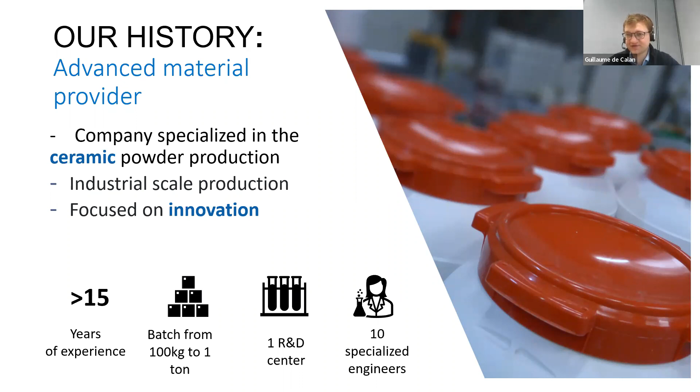It was 2018 when we started developing materials for 3D printing, and what we offer to the market is a line of ceramic and metal filaments. Ceramic being mainly alumina, zirconia, and silicon carbide ceramics, and the metal filaments being stainless and tool steel.

We also offer a whole range of equipment to use these filaments. We're not equipment manufacturers, but we quickly found out that most of our customers required us to offer a full package so that they could really start printing, debinding and sintering our material as quickly and as smoothly as possible. So we do offer equipment that is not manufactured at Nanoe, but we work with partners for such equipment.

Just a very quick word about the technology, and we'll dive more into details afterwards. We talk about ceramic and metal filament, but we actually manufacture composites. That means a filament that is usually a mixture of a ceramic or a metal powder and some binders that will help to shape the part.

This obviously means that to get to a final ceramic or metal part, you need to have a post-process to remove those binders. And that's, let's say, the magic trick that allows us to make a ceramic filament. Of course, if it was pure ceramic, making a filament out of it would be difficult.

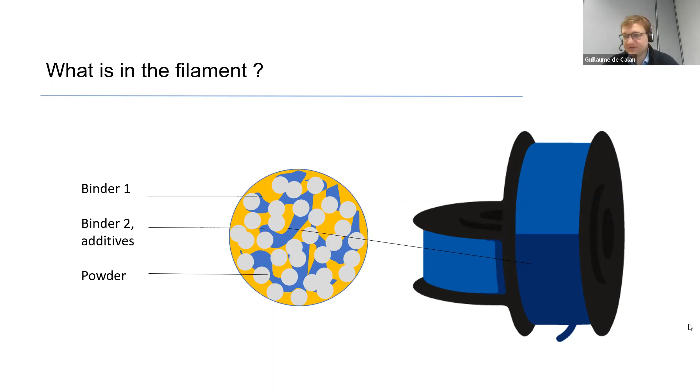So why did we choose that technology? Why did we choose to develop FDM instead of other technologies on the market? For us, it brings a few distinctive advantages for that market. The first one is that it's a really low-cost investment technology. It allows to break the price barrier, and it's also a very easy-to-use technology. And that really solved the main pain point we saw on the ceramic 3D printing market.

Metal is a bit different, but for ceramic, there is still a very low adoption of 3D printing for the moment. We feel that one of the reasons is that there are very few equipments available on the market, and these dedicated printers are usually extremely expensive and quite complex to use, mainly directed at very industrial applications where you can afford such printers and such complexity. We, on the other side, wanted to develop a technology that allows to democratize ceramic and metal 3D printing.

The way of doing that is, instead of having a dedicated printer for ceramic and metal, we use standard FDM, FFF printers from the market, and we just add our filament into it. That makes the technology low cost and quite easy to use, while still keeping the properties of the material. If you have a ceramic, you'll still have the hardness, the heat resistance, and so on. If you have a metal, you will still have the tenacity and the strength of the metal. And of course, the advantages of 3D printing in terms of complexity, small volume production, and all that.

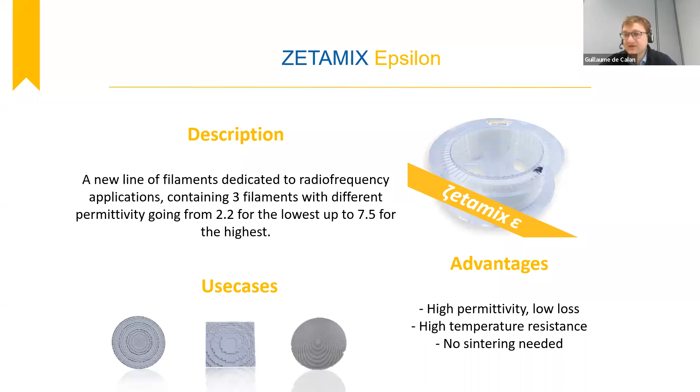So now let's dive a bit into the technology. How does it work and how does each of these steps work? The idea of this presentation is really to cut down the process step by step, so that you really see how that works, understand better, and maybe remove some reservation you may have about the technology. We're going to try to be transparent also about what can go wrong in the process, so that you understand what are the key points you should be looking at.

So the first thing is a global overview of what we're going to see today. When we do ceramic materials, we usually have four main steps: file preparation, which is also called slicing, printing, debinding, and sintering. Sintering is done under air for ceramics. If we switch to metal, then it is very similar, except that you don't necessarily have a debinding step, at least not a chemical debinding step. It does depend on products. And the main difference is that sintering is done under argon, which is really quite different. We'll show a bit of details about this in the process.

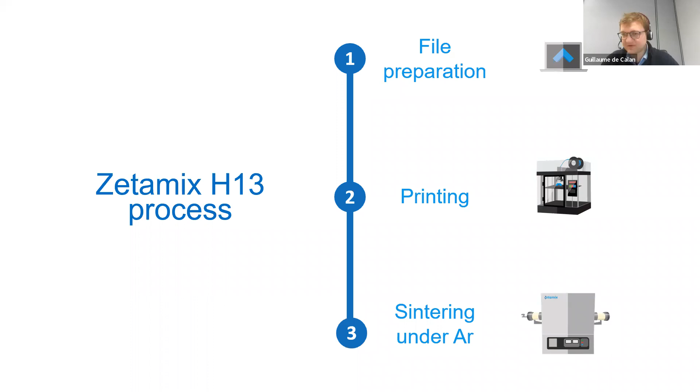So let's start with file preparation. To be honest, that's where we're going to spend the most time, because most of the success of the full process is linked to how you're going to prepare your files. If your file is well prepared, and if your design is adapted to ceramic and metal 3D printing by FFF, once you've printed the part, you shouldn't have any surprises. You shouldn't. But again, that requires understanding the key elements of file preparation, and it also requires respecting design rules.

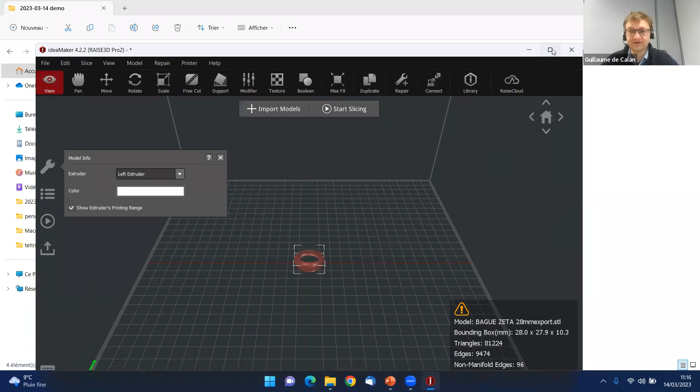So I'm going to go out of my presentation and open the software we're using for file preparation, the slicer, so that you can really see how that works. So here we go. We'll start with a very simple part so that you can see how that looks, and then we'll go into more details. Here you have an example of a part we print very often at Nanoe. It's one of our demo parts, a small ring with the Zeta for Zetamix, which is our brand for ceramic and metal filaments. It's an interesting demonstration for us.

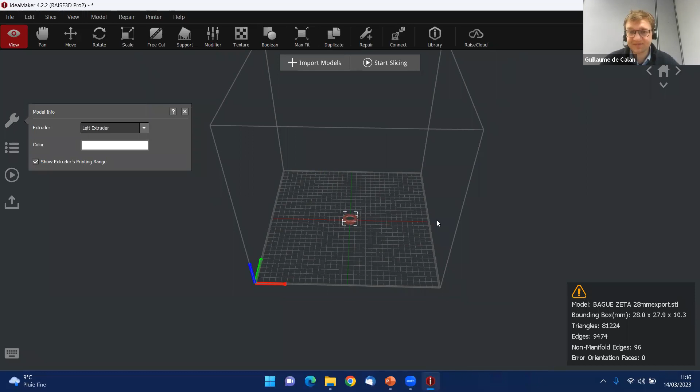We have opened it in a slicer called ideaMaker. It's the slicer of Raise3D, which is one of the brands we're working with. Of course, we could use different slicers such as Cura or others; this would be similar. You can visualize here the actual printing space, which is quite big on this printer: a 30 by 30 by 30 centimeter plate. So if we were printing rings, we could consider printing several. Just by copy paste, you can create the second one, the third one and so on. Here the interest is just to show you, so I'm going to suppress these, but if you have a big plate, you should probably use it.

So once we have the part in the slicer, the first thing we're going to do is scale it. That means we're going to print it bigger than the size we actually need, because we're going to have shrinkage during sintering and we need to compensate for it. The exact shrinkage rate you need to apply is indicated in the data sheets of our products. I might show you that in parallel with the presentation. You go on our website, zetamix.com or zetamix.fr.

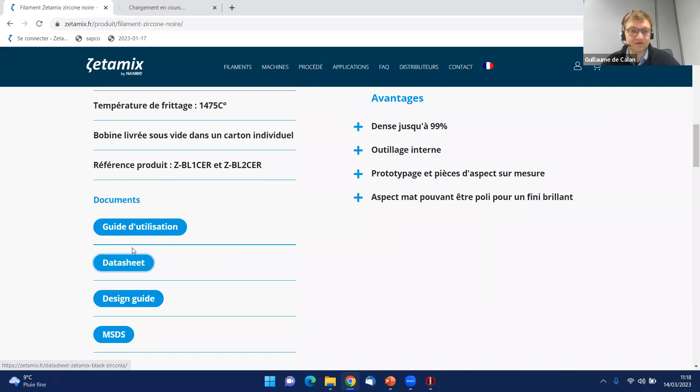You click on the filament you want to use. Today we're going to make the demonstration with black zirconia. So let's go for black zirconia, and here you will have lots of documentation: a user guide, a data sheet, a design guide, and a safety data sheet. So you could use either the data sheet or the user guide. We're going to just click on the data sheet. I think that should be enough.

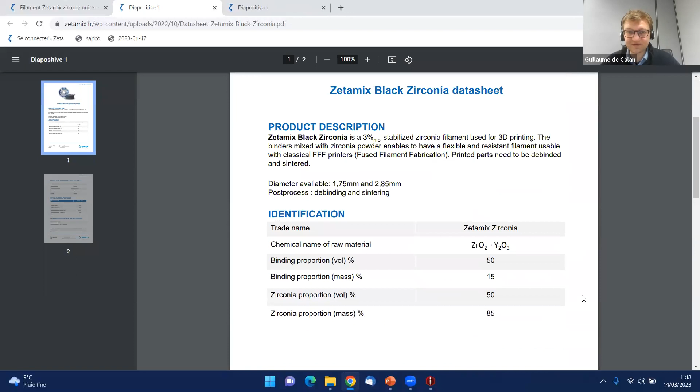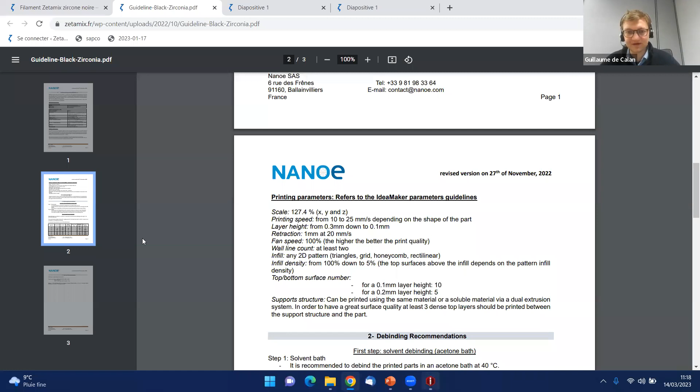And you'll have some information about the filament, and the data we're looking for is the shrinkage. And I was wrong, it's not indicated very clearly here. It is written here, but actually we'll go into the user guide where you'll have it written more clearly on the scale factor. The scale you need to apply to the part is 127.4 for black zirconia. So I go to my part and I say that I want to increase it by 127.4, and that's it. This is the size we need to print if we want to have the right dimension at the end.

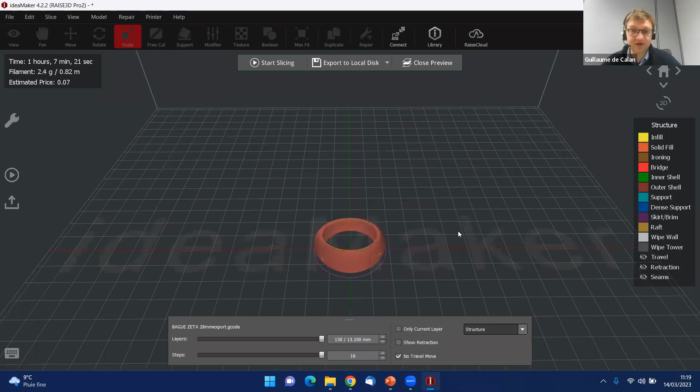So if I want to prepare the file, the first approach is quite simple. I could just go, sorry, I went a bit quickly, on start slicing, use a predefined set of parameters, click on slice, and that's it. The part is ready to be printed. So I can go and have a look at it, see how much time and material it requires. Here's 1 hour for that print. It's a bit long, but probably the printing setups are relatively slow. We could probably do a bit faster, but for a basic print, that's fine.

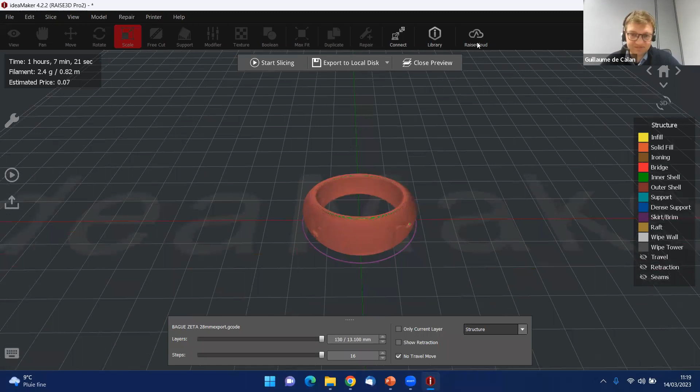I'll immediately draw your attention to one thing, and then we're going to go into the more detailed parameters of slicing. In that part, which is a preview of exactly how the part is going to be printed, you can already see layers if you zoom a bit. These layers here are the way 3D printing works. You're cutting the part in layers, typically 100 micron. If I dive into the print, I'll see several different colors. I see a red contour, a green one, some yellow infill, and also a bit of orange.

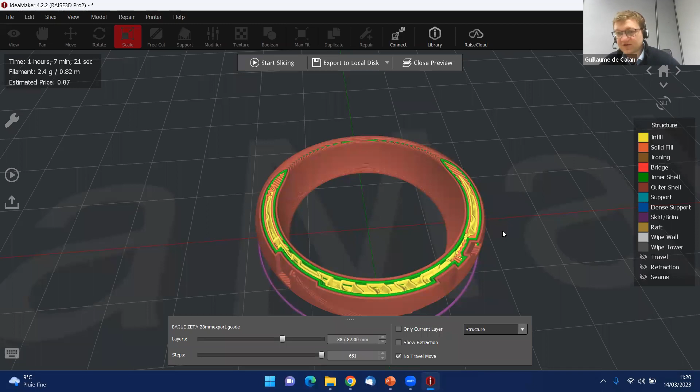All of these are different zones of the print. So usually when you print with FDM, you always start by printing the outside of the part, the contour, what we call the shell. And here we've decided to print two shells, the red and the green, on each side. We do that to have a more precise print and a better surface finish. And then we will fill the inside, and we can decide to fill it completely dense, or, like here, fill it with a porous structure.

That's really a choice. And on the top and the bottom of the part, to make sure that you have something completely closed, you will usually print what we call a solid fill, so the bottom and the top are completely closed. So that's the first thing. With the material, we also offer preset profiles. You can use them directly, no question to ask. It's pretty simple, and that's it.

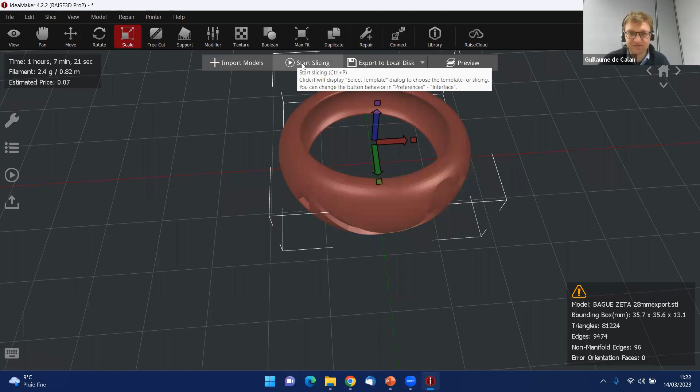So now if you want to dive into more details, you'll see that there are a few key parameters. It was written on the slide. The main parameters that are important and that you may play with, we usually say there's around 10. So if I go back into start slicing, instead of clicking directly to slice, I can either edit or just double click on it. I will have access to all the advanced settings. As you can see, there are literally hundreds of them, with a lot of different parameters and a lot of different tabs here.

So you can really play on hundreds of different parameters, all of them being really relevant. They all do have an advantage and an interest. But for the sake of simplifying and of not keeping you for 2 or 3 hours in a row, I'm not going to detail all of them, just the 10 main ones.

The first one is very obviously the layer height. So basically, I'm going to slice my part into layers. How big are those layers? We usually use 0.1 millimeter for ceramic and metal prints. We could do smaller, but we're a bit at the limit of FDM precision. We sometimes go bigger if we have very big prints, sometimes 0.2, but 0.1 is really a comfortable number for us, and we usually stick to that.

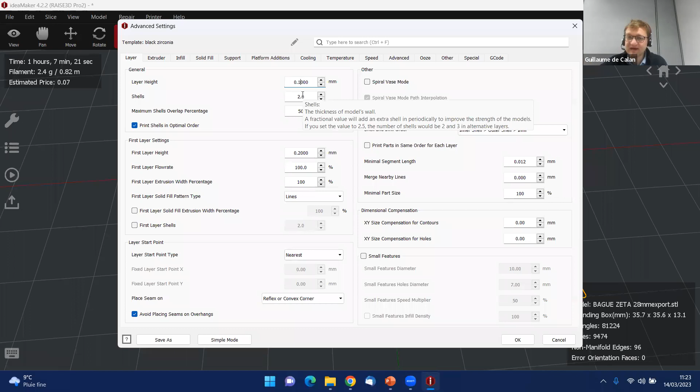It's usually a good compromise also between print quality and time. I did mention the shell, the fact that we're starting by printing the outside of the part so that we have a nice surface, and then we fill the inside. So the number of shells is also a critical parameter, of course, and here we have set it up to 2, which is probably a standard choice, even though it may depend if you need a thick shell or not, depending on: do you need a strong part, do you need it light, are there some specificities, do you need it to be watertight or not, and so on. But the normal setup would be probably 2 shells.

And we'll go to the extruder, where we also have 2 very important setups, the extrusion width and the retraction. The extrusion width is, of course, linked to the nozzle size you're going to use. Usually on our printers, we use 0.4 or 0.6 millimeter nozzles. We've printed with smaller, we've printed with bigger, but usually, again, 0.4 to 0.6 is the right compromise.

And one of the important things is that even if you have the 0.4 millimeter nozzle, you may choose to have an extrusion width which is slightly bigger than the nozzle. And we actually usually recommend it. We recommend to print with a slight over extrusion, which is better for the adhesion between layers. So typically, if you have a 0.4 nozzle, we would print with a width of 0.44.

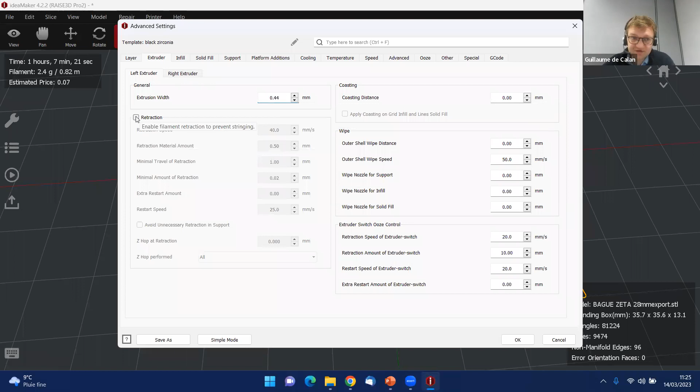Retraction is also very important. Retraction allows you to make travels between 2 zones of the print where you don't print, and to avoid having any leakage of material, what we also call oozing sometimes. So to avoid the material oozing from the nozzle because it's melted, you actually retract the filament a bit to make sure it doesn't come out where you don't need that. So it's important for some prints. For some prints, you may completely deactivate it, but for most prints, we would recommend using a retraction.

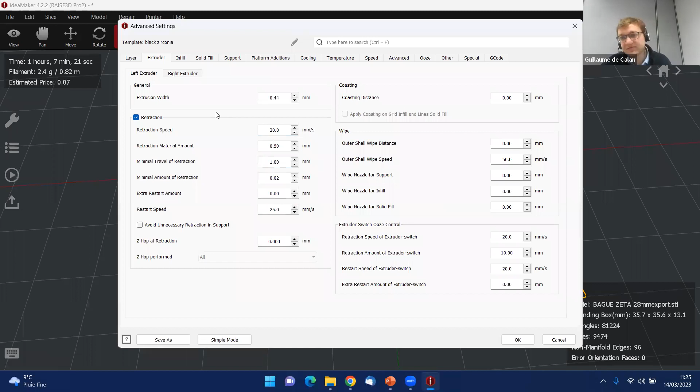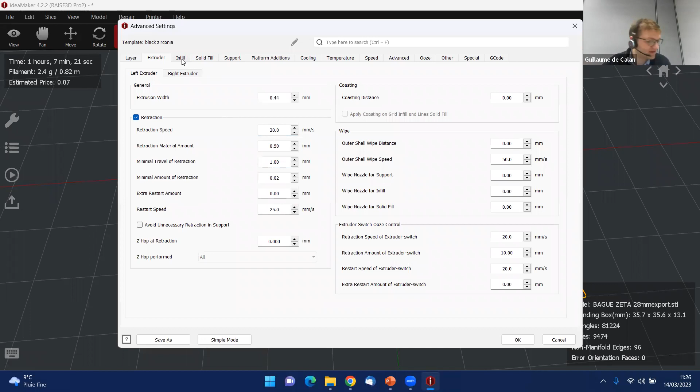The only thing is we're going to be quite careful about retraction speed, probably lower it a bit so that we really have a smooth retraction. The one thing you need to remember about these filaments is that they are relatively brittle, they are fragile, and so if you print very fast and then retract very fast and then reprint very fast, you may break the filament. So we always try to be quite gentle with the filament, and typically on retraction we would be relatively slow. So that's the two main ones on the extruder.

Then there is the infill, which is of course very important. We have a few things to choose here. The infill density, the extruder we're using, usually we use the same material, of course. The infill density, you may choose to put it between 30 and however high you like. Less than 30 is usually difficult afterwards to actually print the top of the part, so we don't recommend going below 30. And the shape of the infill is important also. So you can make grids, honeycombs, whatever. We usually like to use a gyroid infill because it is relatively isotropic, and for most prints it's preferable. But again, that's really a choice.

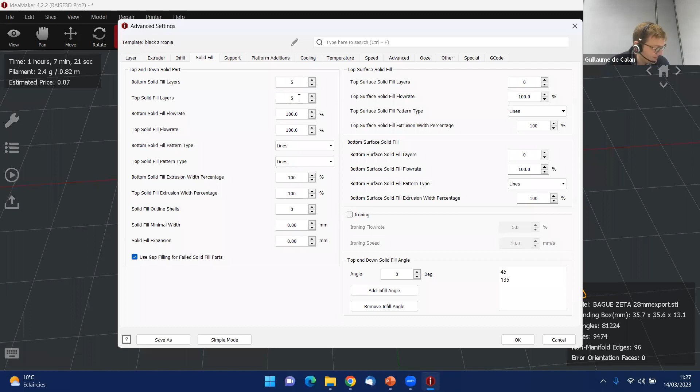Once we've seen that, you'll have the solid fill where you just define the number of layers you want to be fully dense on the top and the bottom so that your part is closed. Sometimes you may choose to have a part which is open on the top or on the bottom. It's actually very favorable for debinding, so sometimes we just choose to leave it open, in which case you just put 0. But that certainly does depend on the part you want to print. We'll talk about support later on, so I'm just skipping this one. The part we have for the moment doesn't need any supports.

Platform adhesion is also not necessarily the most important thing here. Cooling is quite important, but the settings are pretty simple. We usually, for ceramic and metal, try to cool quite effectively, starting at the second layer. So why do we need to cool the part? It's because, of course, you're melting the material to deposit it. If you want it to keep its shape afterwards, it needs to cool down as fast as possible.

And here we will have a difficulty, which you'll see just afterwards: we're printing at relatively low temperature because the material softens at very low temperatures. So if we want it to retain its shape afterwards, we really need to cool efficiently once it's outside of the nozzle. So we'll just put the fans to 100%.

So temperature depends on the filament. It's also in the data sheets that I just showed on our website, which is really where you should look for information, and that's where they are updated every time we have a new version. So the printing temperature for black zirconia is 180, and the plate temperature is 60 degrees Celsius. It's not absolutely compulsory to have a heated plate, but if you have that option, we usually heat it up a bit. It improves plate adhesion a bit.

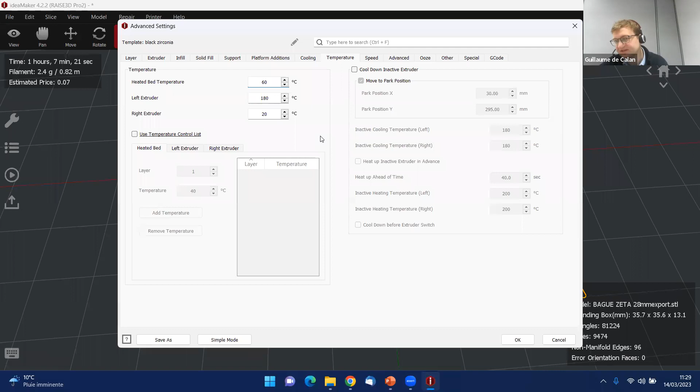Speed is important, of course. We usually print at relatively slow speeds, so that certainly depends on your part. If you have big parts, you may want to increase that. You could go to 40, maybe 50 millimeters per second. But as a first setup, 20 millimeters per second for everything is usually fine.

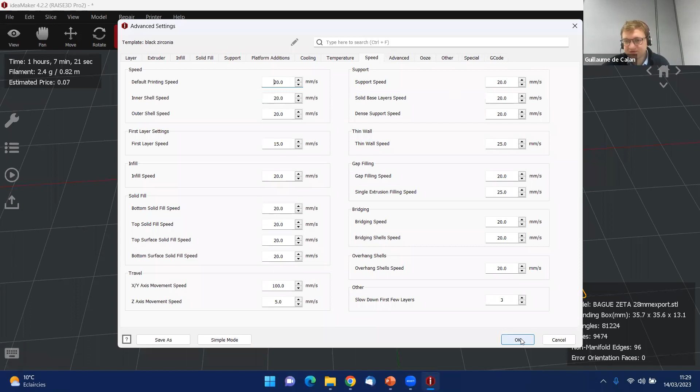And I would say that's it for the moment. The rest are really advanced setups, and I'm not sure you necessarily need to know about these. Once you have filled in all of your information, you click on OK, you click on Slice, and that's it. You have prepared your print. You can preview it just to check if everything is happening as you would expect. Here the print looks good, and then you can just export it either directly to your printer or to a USB stick, and you just launch the print.

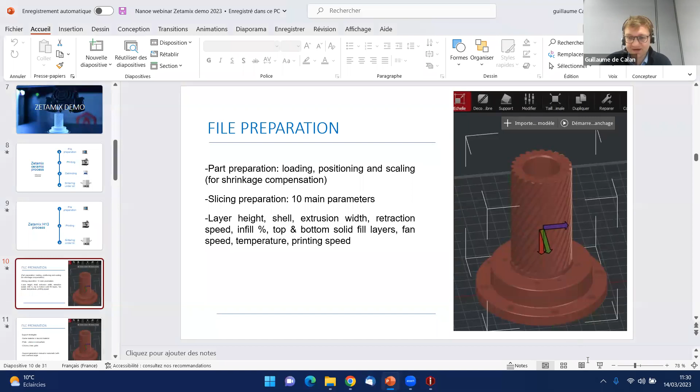So that's it for the basic parameters. Of course, this part was very simple. You're probably going to ask a lot of questions on supports and all that. I already see a few Q&A questions. I might actually have a look and see what the questions are. Some of them are probably answered later on, so I'll keep them for later. But you should really feel free to keep asking.

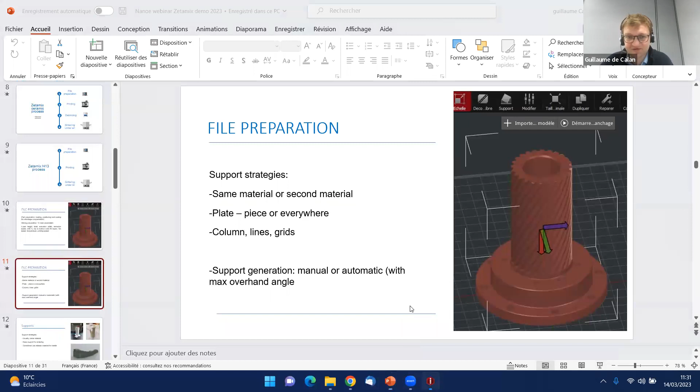So that's really the basic steps. Then you may have a few other considerations. The first one is probably supports. That's something that will happen quite often. You need supports for printing, and sometimes you also need them for sintering. So of course, if I want to do supports, I will need a more complex part, because my part is too simple. You don't need support here. I'm going to delete that one and open a new file. Import model. Wait a minute, I think it's going to be simpler to do it that way because I know where the part is. Here we go.

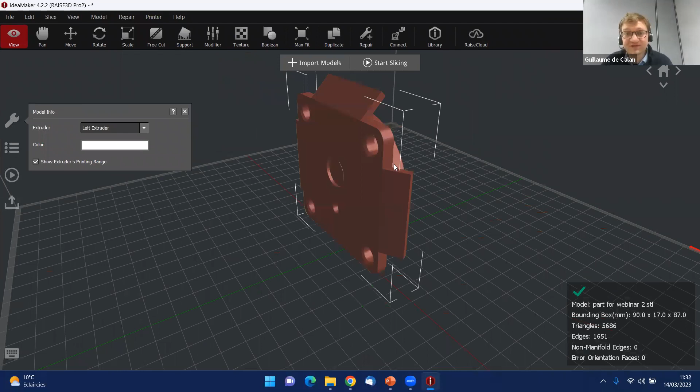So this is a demonstration part we're using quite often, precisely because it shows a few of the difficulties we may have. You have some holes, you'll have some supports, you have some cavities, and you'll have to think about how to print them. So the first thing, of course, is how do I choose to orient that part on the plate? Well, here it's pretty straightforward. I'll have to rotate it. No, not that way. Here. I'll have to rotate it so that I have something which seems logical.

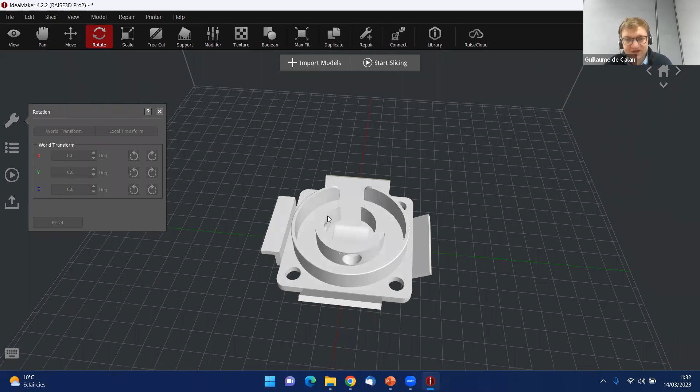But of course, there are going to be a few problems here. This part that you can see here is a 90-degree angle. Well, I'm afraid I can't print over air, so I will need some supports here. This one also will need some. You have a few cavities below that also need some supports. The other ones should be acceptable. Again, you have some rules to define this. You have holes also, and these holes pose the same question: do I need supports or not? So we're going to talk a bit about supports.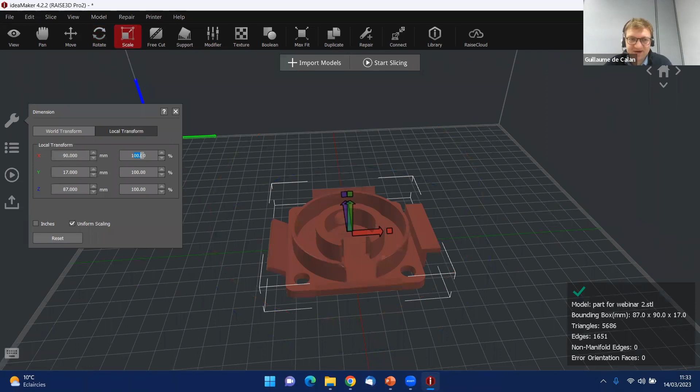The first thing again is I need to scale my part, so I will do that. Right. And then I will add supports. There are a few ways to do that. The first one is you can use the support section here, which will allow you to generate these supports automatically. You can choose from which overhang angle you want them. Let's say it's a 50-degree angle, and you can create auto supports. So you have supports here. Of course, you don't have them on the other two because the angle is less than 50 degrees. You have them here, and you have them in the holes.

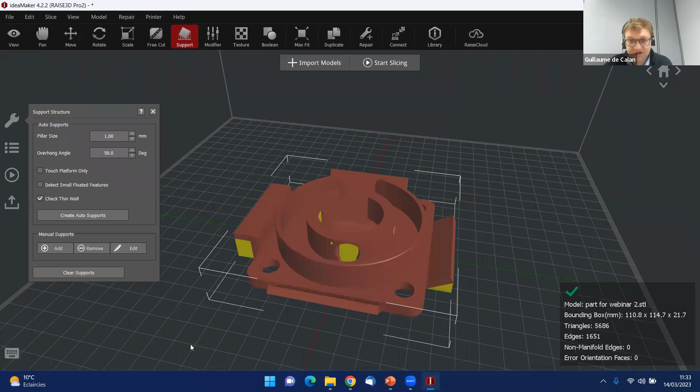So you may decide to remove some. You may say, for instance, that for this very tiny hole, I know we're actually going to manage to print it without supports, so I can remove them just by clicking on remove and manually removing the supports that are in the hole.

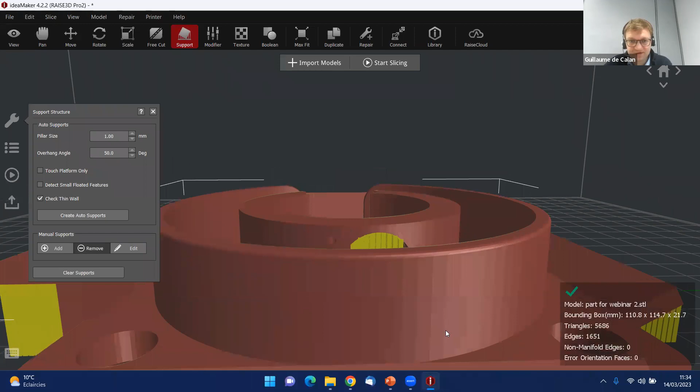Of course, I might have to turn a part to check that I've removed everything. I haven't. Here we are. You may do that on a bigger hole if you feel confident you might manage to remove those. So that's the general idea. I guess you understand what I mean.

So the interest of generating these supports at this stage is that you can control where they are. You can decide to put them or not, and that might be of interest. I'm going to clear them because I'm also going to show you another way to do that, which is the one we usually use. We usually don't place the supports manually. We just use a slicer to do that by giving it the right instructions.

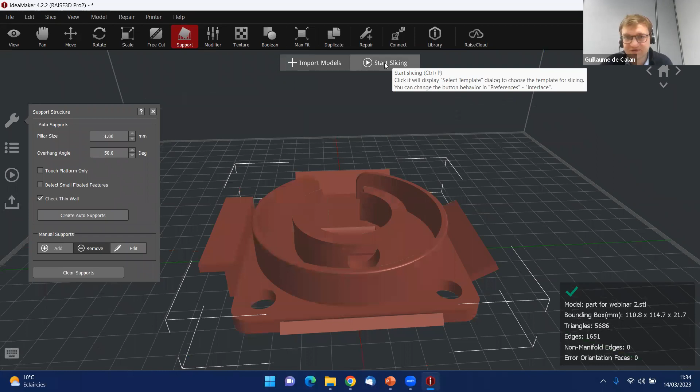So we go back to start slicing. We'll go into the details of this slicer and supports. Here you can choose to add supports either from the platform or everywhere. Let us say here that I'm confident that I can print the hole without supports. In that case, I would choose to use just touching platform. You can choose if you're printing the support with the same material, in which case you're going to use the left extruder because we're printing the part with the left extruder, or with another material.

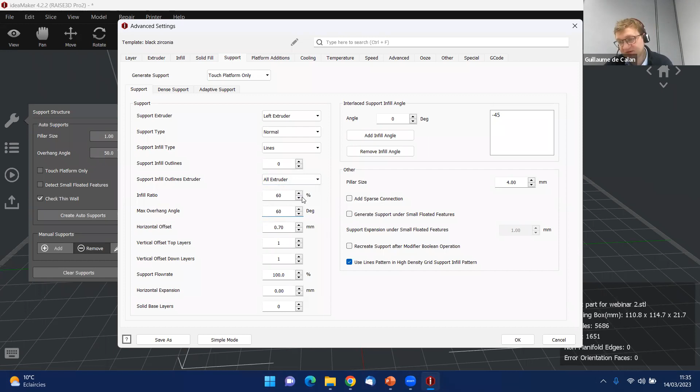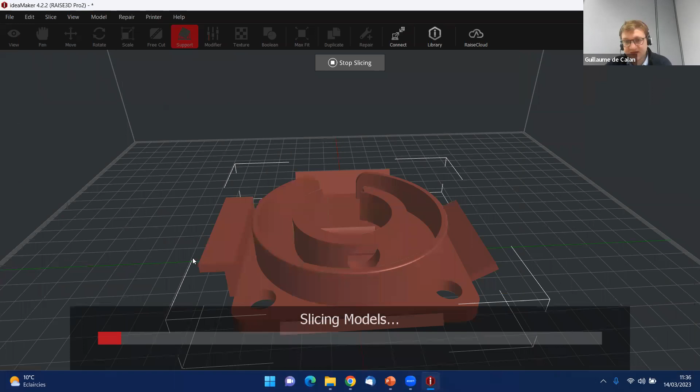You can choose the type of support, and we usually like to have supports which are lines because they're easier to separate afterwards and to remove. Decide from which angle we need to add supports: we usually say between 50 and 60 degrees. Less than this angle, you can just print them and it's going to be completely okay. But yes, if you have more than 60 degrees of overhang, you may need to add supports. So I click on OK, slice, and we should see supports appearing in the right places.

And this one takes a bit longer. I'm afraid my computer is a bit slow at the moment.

So these supports are really extremely important, of course, because without that you can't print a part, but you may also need to retain them for sintering. That's one of the crucial things. Especially with metal, you may need to retain those supports for the sintering stage.

I was not anticipating that my slicer would be so slow. Sorry about that. I guess it's going to come in a minute.

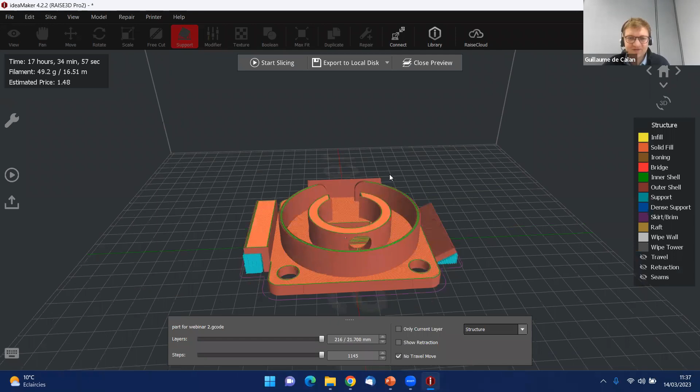Here we are. So you can see that we have supports here, which should be the case. We have supports here. We also have supports there, here and there in the small cavities. If we zoom on how the supports are made, you can see that these are actually lines which are adjacent. This is interesting because it makes it relatively easy to remove either before or after sintering. You just take a pincer and pull them out, or with a flat tool you can just separate them. It's relatively easy to remove, which is why we like that kind of supports.

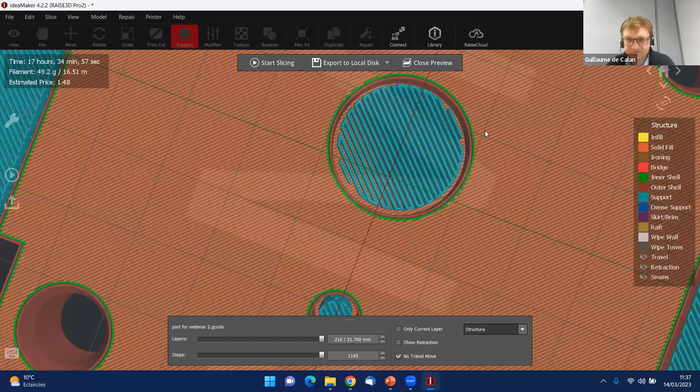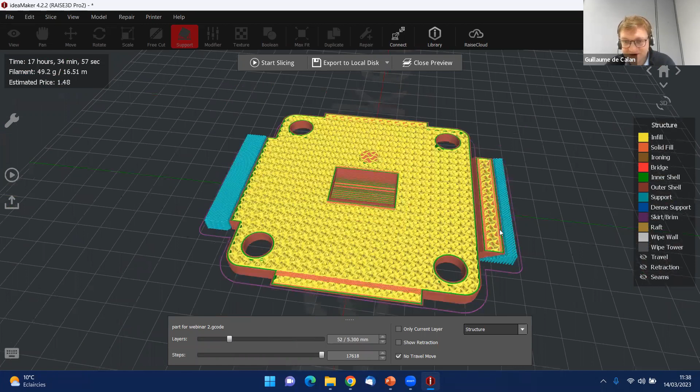And the rest of the part is again really very similar. If we dive into the part, we're going to see the infill in yellow, the shells in green and red, and you can see here really the heart of the part with supports on both sides, the infill, and well, everything looks okay for me. So that's it for supports. There are a few other things that might be seen.

For metal, it's even more crucial because metal is sintered at a temperature which is really very, very close to the softening temperature of metal and even the melting temperature of metal. So the metal is literally soft when you're at sintering temperature. So you need those supports to stay there during sintering if you have significant overhangs.

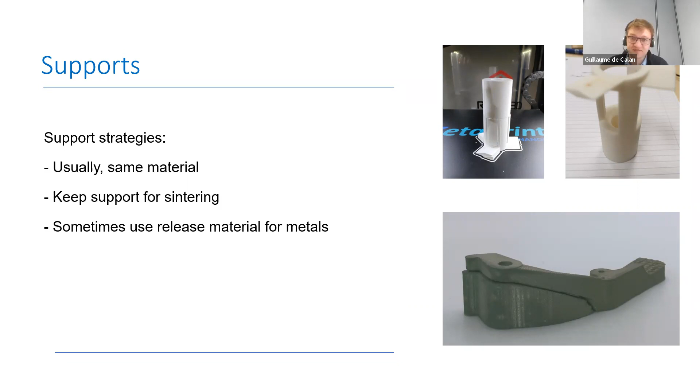There are a few other things that might be noted at this stage, which are linked to print preparation and some things that you should take into account if you want to avoid deformation and cracks during the rest of the process. The first one is we need to avoid high thicknesses. If you have a very high thickness in a part of a fully dense material, you take the risk of having cracks.

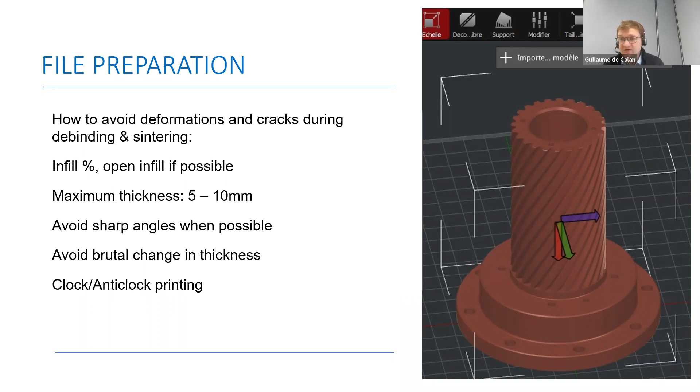So typically we usually say more than 10 millimeter of fully dense wall is really hard to achieve, and we prefer to stay below 5 millimeter. Actually, 5 is our recommendation. That means if you have a wall or an element of your part that is more than 5 millimeter, we usually print it with infill to avoid those cracks and deformation.

So that the solvent can actually get into it, it's even more favorable. So when we have the choice, when we can leave the infill open in some way or accessible to the solvent, we do it. Sometimes it can be just 2 small holes. Sometimes it can even be one part of the top or the bottom of the part which is completely open. That's even more favorable and makes for faster debind and sinter. It's not necessary, however; you can close the top and bottom and still debind the part if you respect this 5 millimeter limit. It's just gonna take a bit longer for the solvent to reach inside the part.

If possible, we should avoid sharp angles. 90-degree angles are usually favorable places for cracks to occur. If you look at the part which is in the illustration here, typically on each step we would try to add chamfers to avoid a sharp 90-degree angle. That would be really more favorable. We should avoid significant changes in thickness. Having a very big thickness at one part of the print and a small thickness at another part is risky, and especially it's risky for deformation.

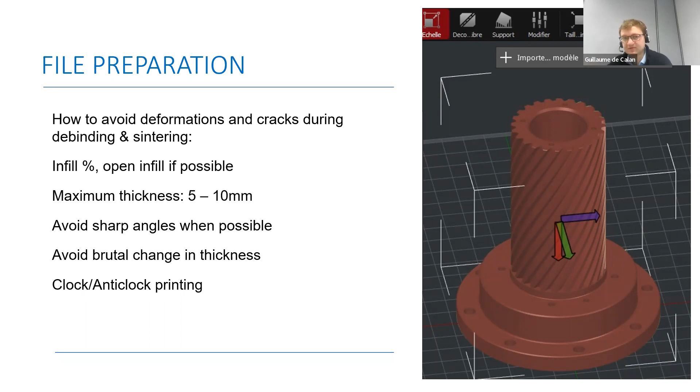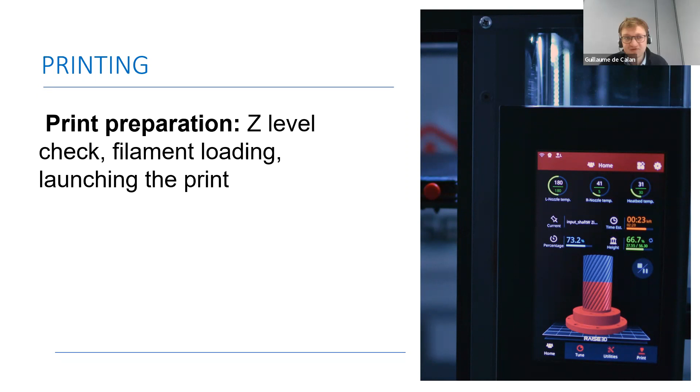So printing is very straightforward. It's very similar to normal FDM, so I'm going to go quite quickly on this, just to remind that you need to be careful about having a proper first layer, that it needs to be perfectly aligned. You need to load the filament and then launch your print. I'm actually going to accelerate a bit on this because this is a demonstration of what we usually do when we print with our material with an old printer, which is called the Raise3D Pro 2. The new one is a bit updated from this one.

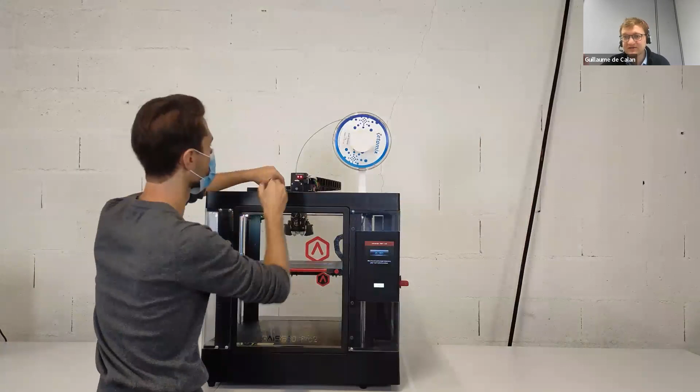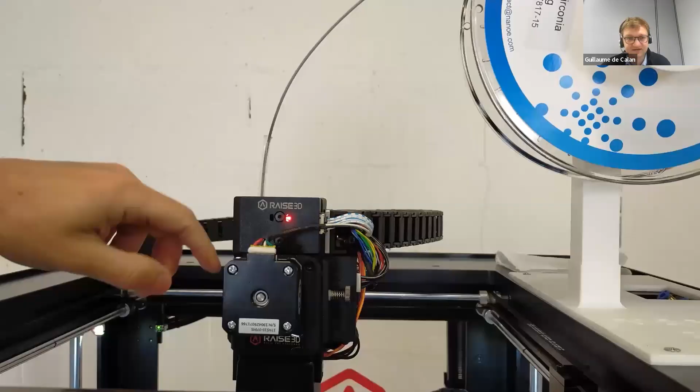So you can see here that the spool is placed on top of the printer. That's the one modification we do to most printers. The filament is relatively brittle, so having it directly on top of the extruder is more favorable. You can also see that during manipulation, the operator is quite careful at that stage. Again, the filament is brittle. The moment where you risk more breaking it is actually when you manipulate it. So we're careful at that stage.

Well, you can see that here he's inserting the filament. This is really a fairly straightforward thing. We've opened it so that you can see what happens when you load. The extruder will start turning and will push the filament through the nozzle. That's really fairly straightforward. We usually don't open it for loading the filament. It's just to illustrate here how that works. So you close, you screw it.

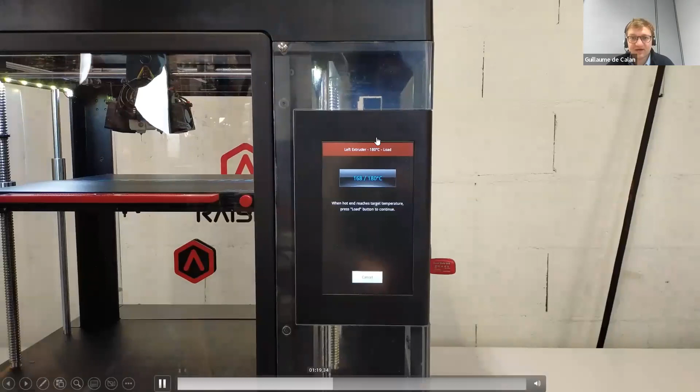One of the crucial things with most printers is how tight we will set this screw, this extruding screw. It does need to be sufficiently tight to allow for the printing process to happen, but not too much because you may crush the filament. So this setup on that screw is quite important.

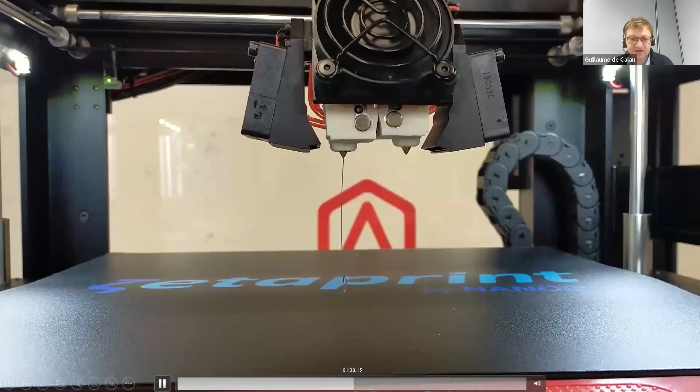Then you need to do the bed leveling. On most modern printers, and it's the case of the Pro 3 that we're using now, this is automatic, so I'm going to skip a bit of this. But if you don't have an automatic bed leveling, having a good bed leveling is really important. So here we're just loading the filament, making sure that it's completely inside the nozzle, that there's no air remaining. And so here we're doing the bed leveling, but I guess I can skip that.

Yeah. Again, most printers now use an automatic bed leveling, so you don't need to check that. It's quite important, of course, if you want to use the full surface of the print, that the full surface is flat. If you have to do that manually, it's a bit tedious, so that's why most printers now have a probe that will check if the bed is flat and compensate for small unevenness. And we usually will favor that when possible.

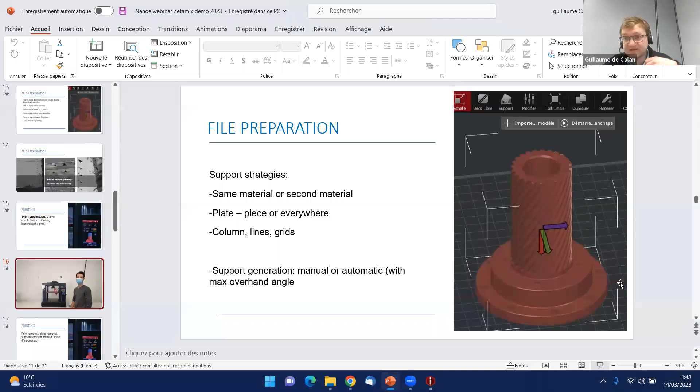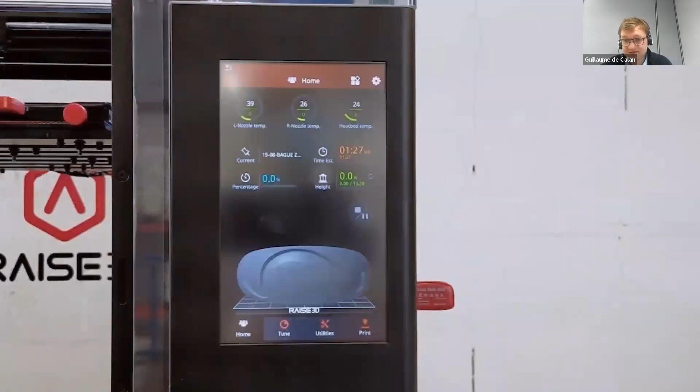Well, once this is done, it's really, really very straightforward. We'll just launch a print and then remove the part from the print. So here you see, printing is really straightforward. I hope this is an accelerated version, because the print probably lasted a bit longer than what I showed you, something in the range of half an hour.

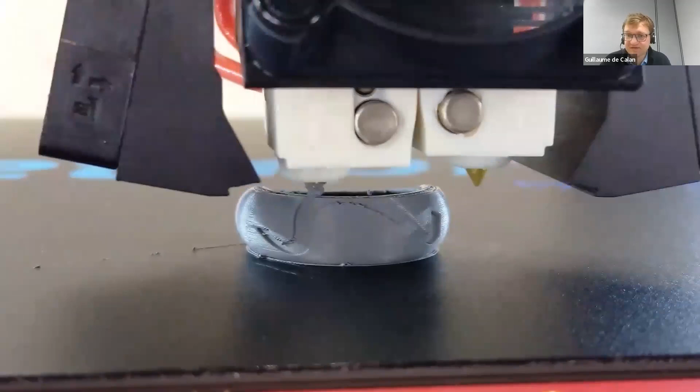And once the part is printed, to remove the part, we usually use flexible beds so that it's easier to remove the part from the bed. One of the very important things is, again, these materials print at low temperature, and they're quite soft, which means if you don't want any deformation when you remove the part from the print, you need to wait until it's properly cooled down. That's really important.

And then once you have the part printed, you'll go to debinding and sintering. This explains a bit what's happening in the process. Most of our filaments use a two-step debinding process. That means chemical debinding and then thermal debinding. Chemical debinding is done with acetone, and thermal debinding is done in the furnace just before sintering.

What happens actually is that in our filament, you have several binders. You have a backbone and a soluble binder. The soluble binder will be removed during the first step. That helps a lot the following process, because first it removes half of the binder, and it also creates a network of porosity that will help you remove the rest of the binder, which is actually going to be burnt out, and so the gases of this burnout can come out of the part more easily.

This is usually... if you have cracks, you'll usually see them already in the solvent extraction, and if not, you'll see them afterwards in thermal decomposition. But usually you see them already during solvent extraction. And if you have cracks, that usually means you haven't made a complete debinding, and you still have too much binder in the part when you remove it.

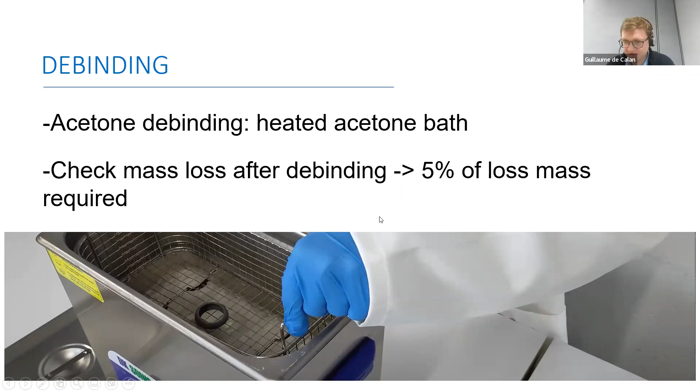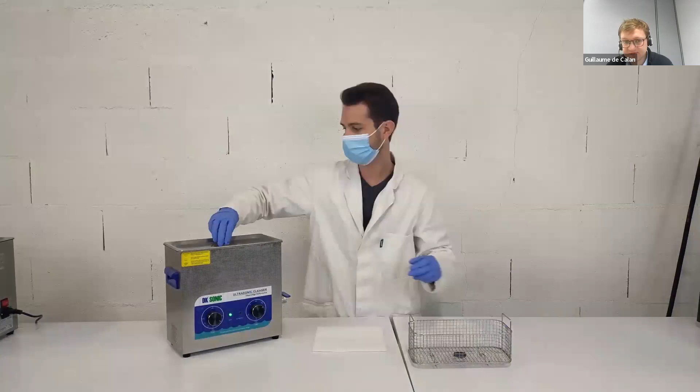Well, the way it works is really very, very simple. We use ultrasonic baths. We actually don't use the ultrasonic. We just use it because if you want to speed up the process, you may heat up a bit the acetone. So we put the part in the basket. We put the basket in acetone. Usually when we put the part in acetone, the acetone is cold. We'll close and heat up. So we just launch the heat just before opening, but that's similar. You have to wait for a few hours, and then you can just remove the part.

If the part is really massive, if you're worried about cracks, sometimes we also cool down the acetone before removing the part. This avoids some cracks appearing during the part dry out. Once you've done that, the part is going to dry relatively quickly because acetone is very volatile, but you do need to wait maybe for 1 hour, and then you can go to debinding and sintering.

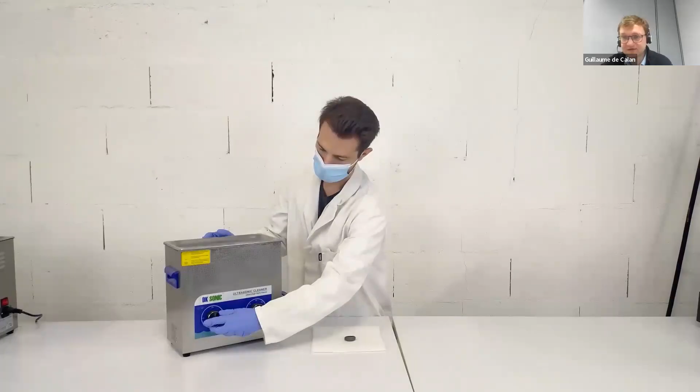So sintering, what happens during sintering? So that's usually the bit of the mystery part for most of our customers who are not experts in ceramic material. So it is a bit counterintuitive, but sintering is a process where we will densify the part without melting, of course. We want to retain the shape of our part, so we won't melt. We will just use a solid diffusion at high temperature to densify the part.

We typically go from a part which is, after debinding, very porous, of course. It has between 40 and 50% of porosity, to a part which is a lot denser, between 90 and 99% density. Ceramics is 99. Metal is usually 95. It does depend a bit on the sintering process, but that's the usual value, which implies the shrinkage we were mentioning, the shrinkage of 15 to 20%, which is very significant and which is quite impressive when you see the part.

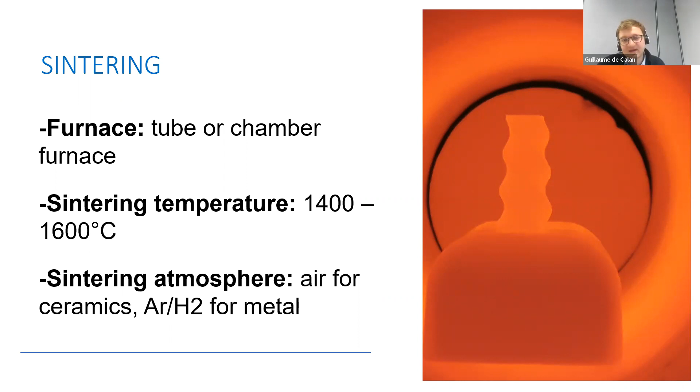So for sintering, we usually use either tubular or chamber furnace. We do offer both of them. The interest of chamber furnaces is they're much more convenient, but the drawback is that you can't sinter metal in it. You can only sinter ceramics. With sintering temperatures between actually 1,400 to 1,600. And the atmosphere is air for ceramic and usually argon or hydrogenated argon for metals.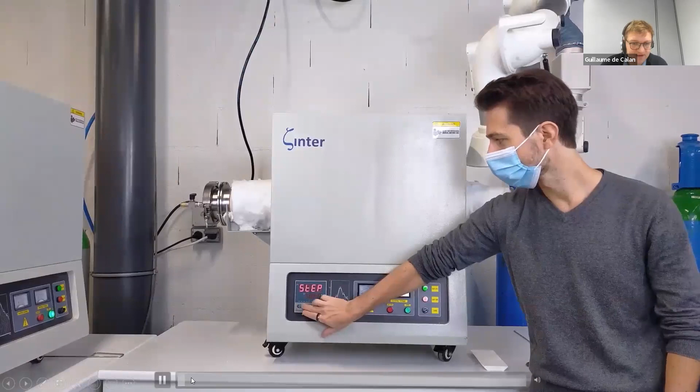We have an example here. Again, I might accelerate a bit. So you program your furnace. It's already programmed actually, so that's pretty straightforward. You place your part on a setter. You put it in the tube if you're using a tubular furnace. If it's a chamber furnace, you just open the door and put the part in it. It's a bit more simple.

You push it to the middle of the furnace with a dedicated tool, a small pusher rod that we supply, of course. You add some heat shields, some blocks that protect the tube and the furnace and actually keep the heat inside the hot zone. And then you just close the lid and that's it. You're ready to go. If you do ceramics, you actually don't necessarily need to close this. You can keep it open anyway. We're not going to flow it with gas.

The process is quite long. It takes approximately 2 days. And at the end of it, you just open your furnace, make sure the part is cold before taking it out, or you can use protective gloves, of course. You use the same tool to remove these heat blocks and then to get your parts. That is really fairly simple.

I guess we're gonna use a sintered part. Yeah.

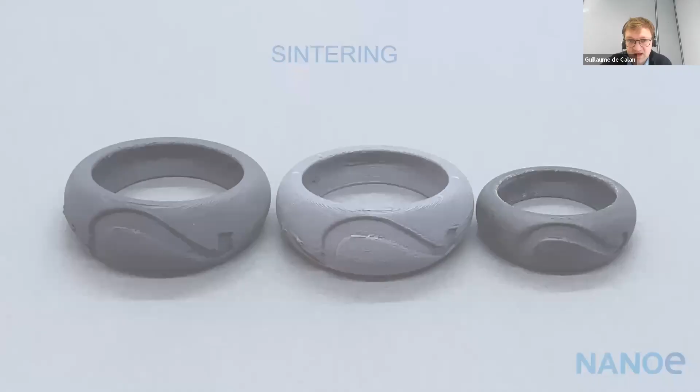If we're interested in metal, the process is again similar, but with a small difference, which is we need to flow the chamber with argon. So the beginning is the same. We just push the part in the middle of the furnace. We put the heat blocks, but then we will have to close the tube and we will put it under a neutral gas, which is what you're going to see very quickly.

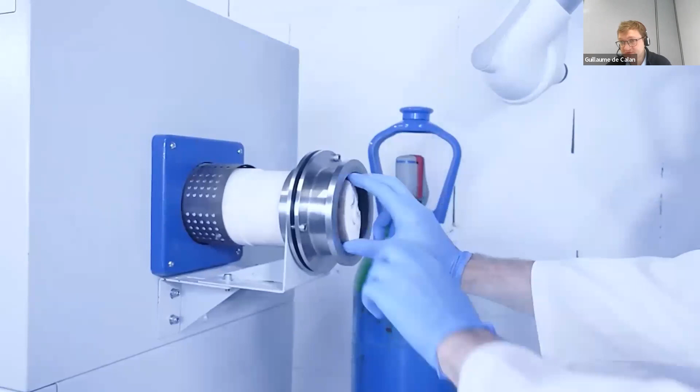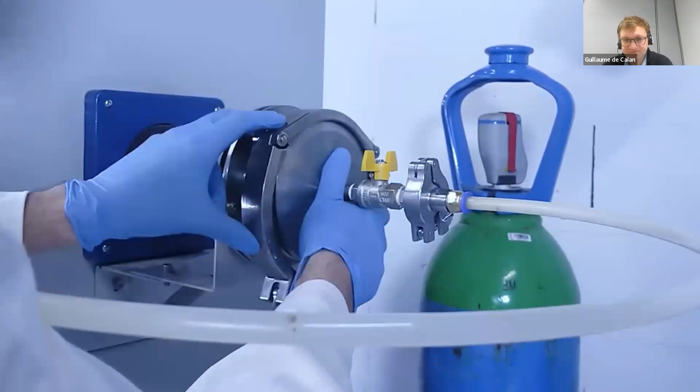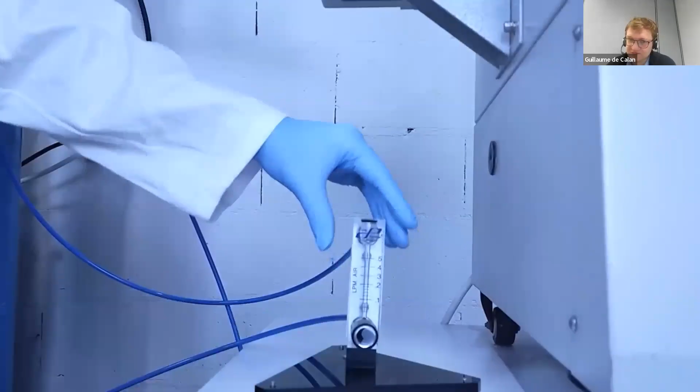So here you can see we have a vacuum pump. We can use it for flushing the atmosphere at the beginning. Actually, it's optional. We don't always do it because anyway, the process is relatively long and we will flush the furnace during the process. You open your gas supply, which is usually hydrogenated argon. We put a slight overpressure of 0.2 bars.

On the other side, you can see that it's closed at the moment. On the other side, we will put what we call a bubbler, which makes sure that you don't have any leakage, that you don't have oxygen coming the other way around. So on one side, you have the gas supply, and on the other side, you have this bubbler, which will guarantee that you have something which is completely gas tight.

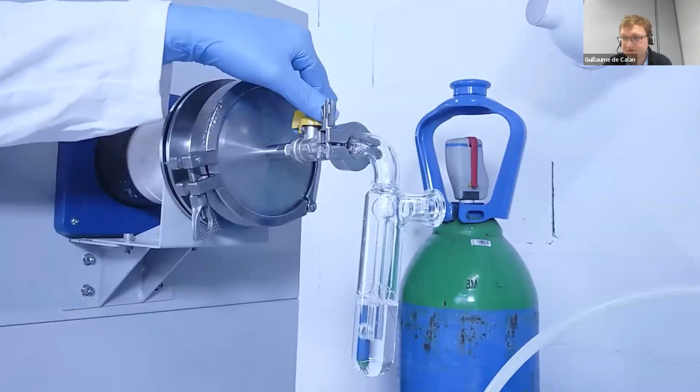So the way this works is that you actually fill the bubbler with water, and you'll see that it allows for making sure that air doesn't go through in the wrong direction. This is crucial. You may think that just with the flow you can avoid having oxygen in the chamber, but having a completely neutral gas without any oxygen is difficult, and you really need that part to make sure you have the correct gas supply.

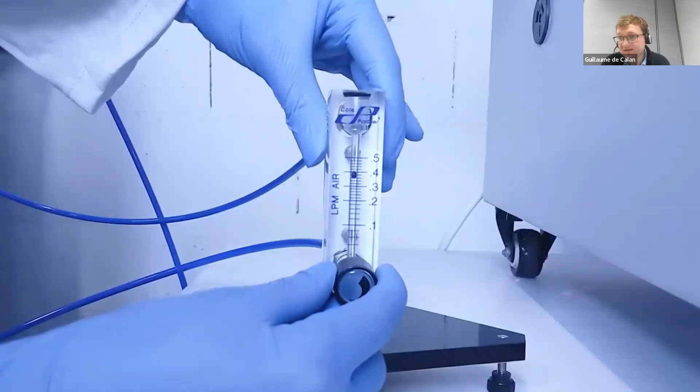And you can actually visualize the gas flow with the bubbles that are coming out of the bubbler. That does give you an indication, and then you can set up the precise value with that flow meter that will give you the number of liters per minute, and we do give recommendations for sintering our metal parts. At the end of it, you close the bottle, you open on one side, and you can remove your part. Again, that's very, very straightforward.

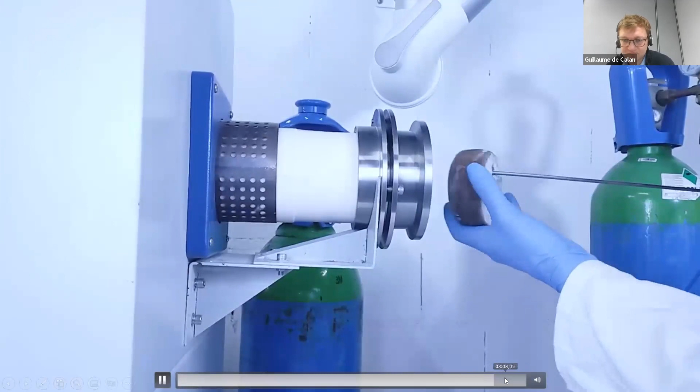I guess we've seen most of it. You remove the heat blocks, and then you can remove the sintered part. Right. And then, of course, you may choose to do some finishing, especially if you're using aesthetical parts. Ceramics are quite often polished, in which case we use tumbling a lot. It's a very convenient process. Metals, we usually use sandblasting, which is very efficient, just to have them nice and shiny, but that's not usually required by our customers.

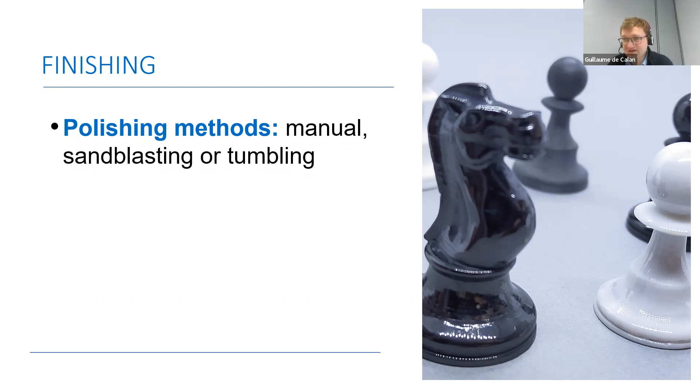And so you have the part at the different steps of the process that really gives you an idea. So what are the takeaways of this? You can see from what we've shown you today that, step by step, this is relatively simple. Of course, you have those 3 steps, so that makes the process sometimes a bit complex compared to printing PLA, but still, as a process to make metal and ceramic, this is really the most simple process on the market. That's really what we want to bring to market, a simple technology that is easy to use. To give you an example, usually training takes 1 day.

We sometimes do workshops where we invite people to come either at our place in Palaiseau in France, close to Paris, or we'll also do one, for instance, at the ECerS Congress in July, where we actually invite people to try, and in 2 hours you can have printed your first part. And that part will turn out well after sintering, really. So that's an easy to use process. That's the first thing. The second thing is it's low cost.

A full package with printer, debinding, and sintering costs 15,000 euro, and that's really the public price. You can order it from our company, from our resellers, but that's the ballpark price for a complete system allowing you to print ceramic and metal parts. This is really unique. I mean, you don't have any other technology on the market that allows you to get that kind of part with such a low cost investment.

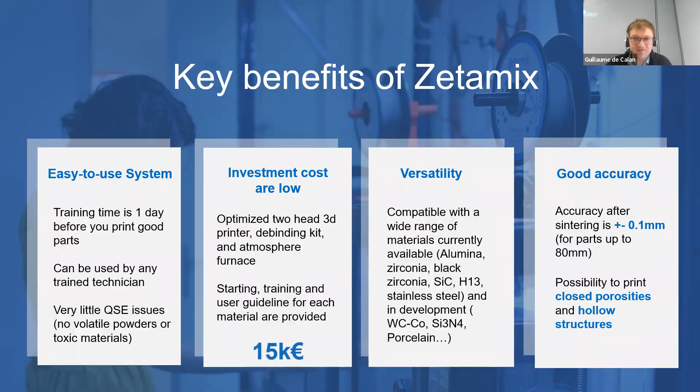I'd be careful when saying that because it does depend on designs. Sometimes it does require an iteration to make sure of the shrinkage you have and to compensate for it before you get there. But that's, let's say, the limit value you could have. I think that's all, and I'm open to questions. I'm sure there are already a few ones, so yeah, I'll be happy to answer those questions.

All right. We have a question from Dan about the margin of error for components. So, well, I guess I started answering a bit right now, but that could be a topic for a webinar in itself, accuracy of the technology. So that depends what we call accuracy. We do differentiate accuracy, repeatability, precision. All of these are different ideas. So there are a few things here.

To give you an example, let's say tomorrow I want to print this part. You just saw it in the webinar. This one has been sintered. It's a 5 centimeter part. I've never done it. I print it for the first time. Just use standard procedures, standard shrinkage, nothing modified. I could end up well with a plus minus 0.1. Usually that does, but I could also have surprises because the shrinkage doesn't happen as it is supposed to. There's a bit of deformation or something like that, in which case I might end up with a plus minus 0.2, 0.3. In the worst case, sometimes 0.5, that happens. Even on a part which is just a few centimeters.

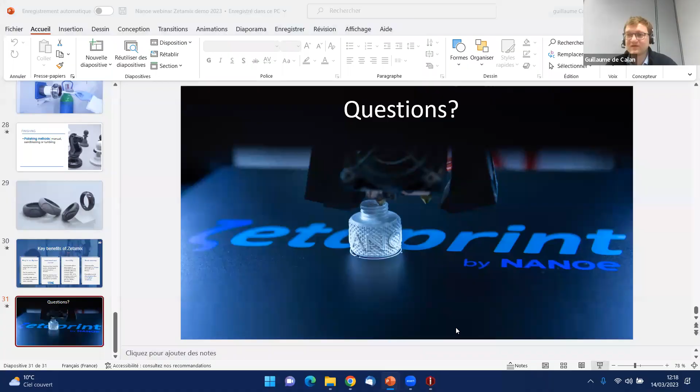Of course, you need to make sure that the structure you're printing is much below the wavelength of your part, typically 5 to 10 times smaller. But if that's the case, you will end up with an equivalent permittivity, which is basically in the middle of air and your material properties.

There was also a conference from LEAT about this, and there are probably some proceedings somewhere, so you can find them if you look into this, and you'll see some detailed explanation of how that was done. That can be done, of course, with our ceramic materials, which have very high permittivities. It can also be done with our dielectric materials, which have a bit lower permittivity, in the range of 2 to 7.5 for the highest. But still, it can be done also in those ranges with the dielectric filament.

So is the resulting steel comparable to cold process or to cast steel? Unfortunately, not exactly. It's a sintered steel. It's comparable to what you would have with MIM, for instance, metal injection molding, but you still have a bit more porosity than what you would have with a cast steel or machined steel or a cold process steel.

One of the reasons for that is that we decided to stay with sintering under argon, or potentially argon with a little bit of hydrogen, and we didn't switch to pure hydrogen, which is a compromise. It's a little bit less good for mechanical properties, but it makes for a much more simple process and much more affordable furnaces. So we decided to stay that way. It's a bit below that, and it's closer to what you would have with MIM.